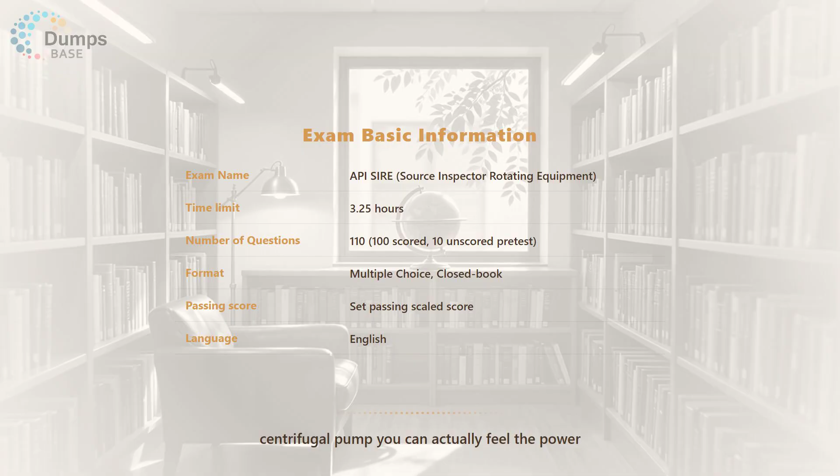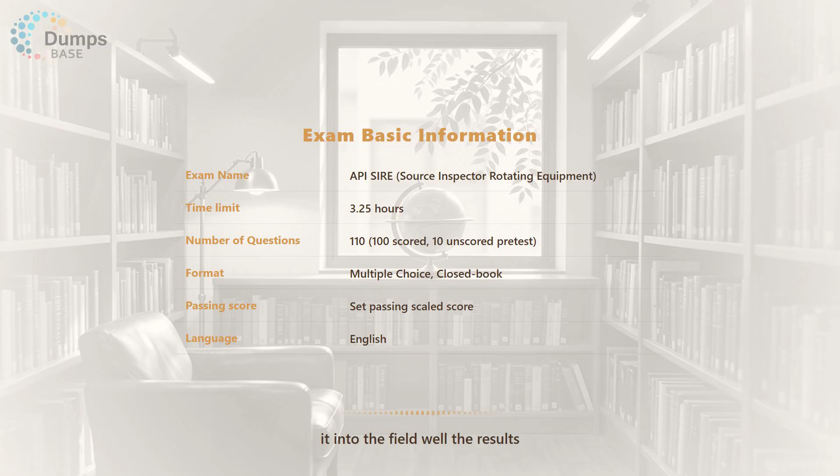Standing next to a massive industrial centrifugal pump, you can actually feel the power vibrating right in your chest. Absolutely, it is thousands of pounds of metal spinning at mind-bending speeds. And if one microscopic flaw makes it into the field, the results aren't just expensive, they are explosive. Which is exactly why the inspectors guarding the gates at the factory have to be absolutely uncompromising.

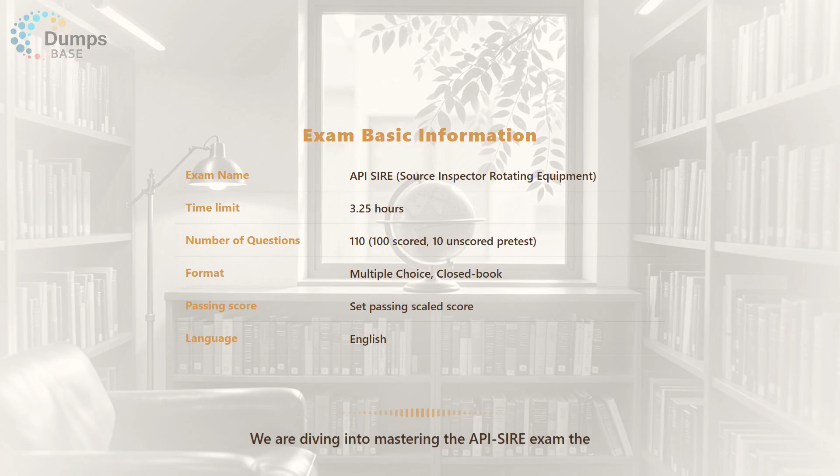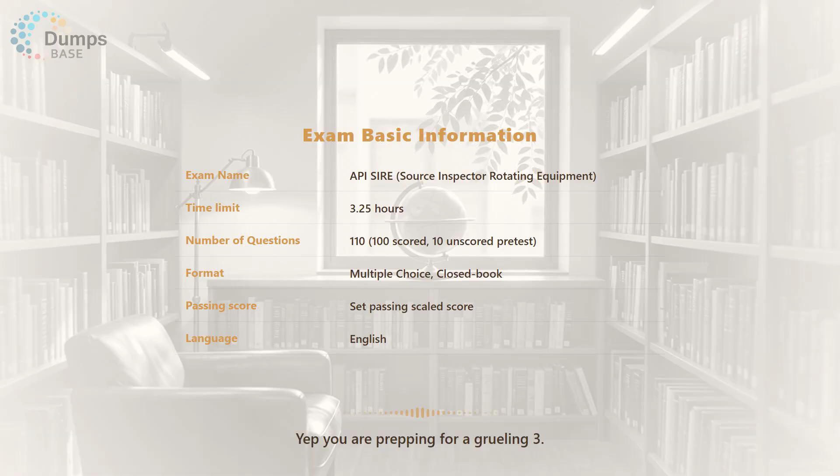And for you listening, joining those ranks is today's mission. We are diving into mastering the API SIRE exam, the source inspector rotating equipment certification. You are prepping for a grueling 3.25-hour closed-book marathon, 110 multiple choice questions in English with 100 scored.

Okay, let's unpack this. We are going to read five full practice questions aloud, but we aren't just giving you answers. We are tag teaming every single option, A through F, so you understand the exact underlying logic the exam demands. All right, let's hit the factory floor with our first scenario.

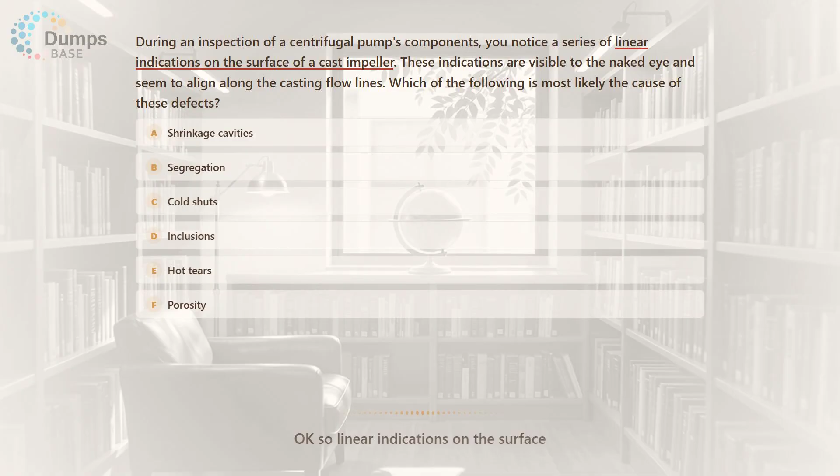The question goes: during an inspection of a centrifugal pump's components, you notice a series of linear indications on the surface of a cast impeller. So linear indications on the surface. Right, and they are visible to the naked eye and seem to align along the casting flow lines. Which of the following is most likely the cause of these defects?

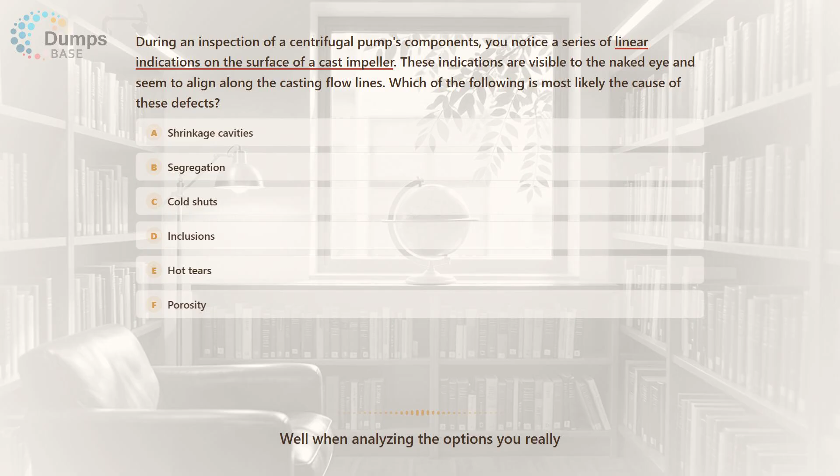Well, when analyzing the options, you really have to visualize the physics of molten metal. Could it be A, shrinkage cavities, B, segregation, or C, cold shuts? Or what about D, inclusions, E, hot tears, or F, porosity? Is this like baking a cake that cracks when it cools down too fast?

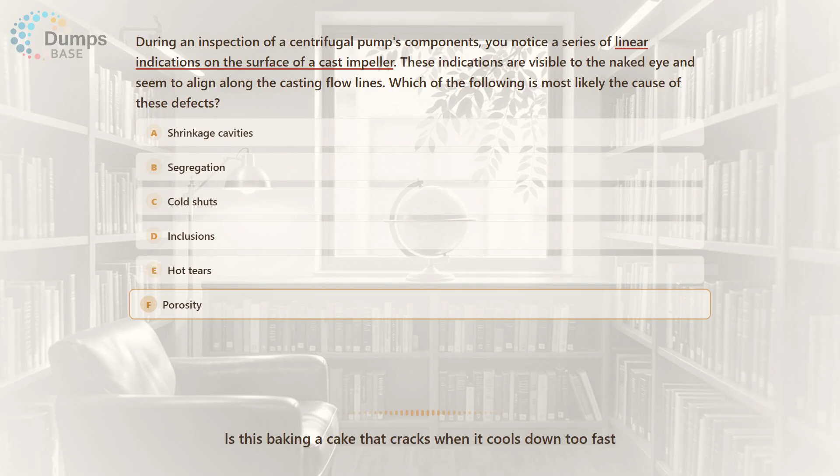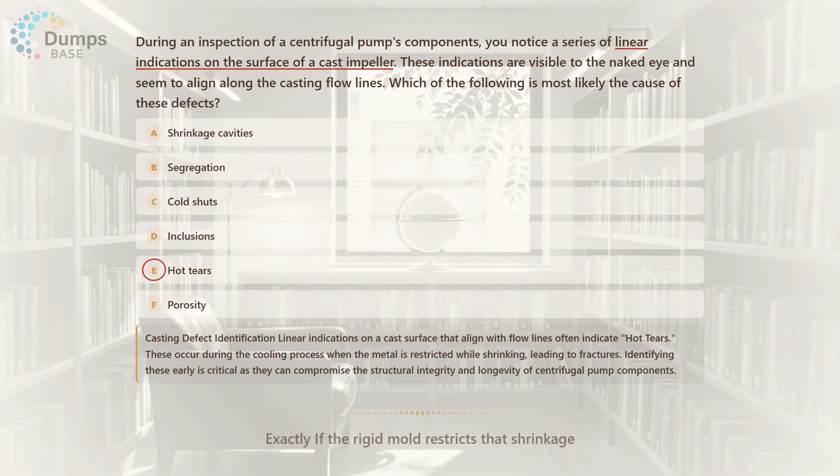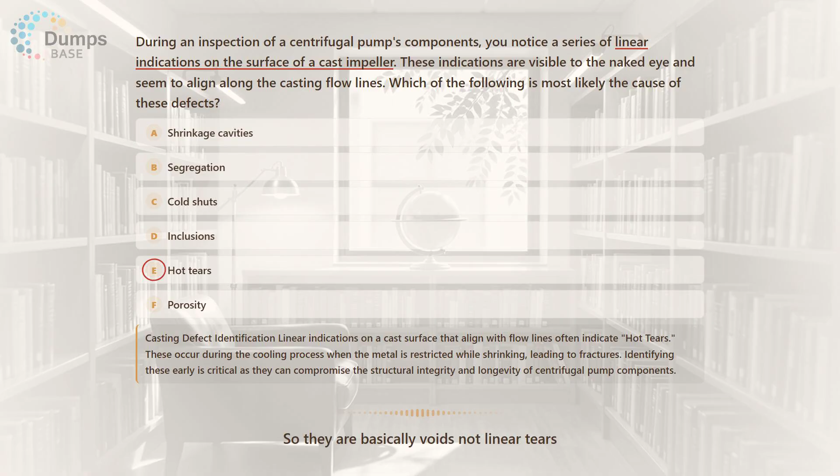Yeah, actually, the physics are remarkably similar to that. That tension points us directly to option E, hot tears. When molten metal cools, it inherently shrinks. So it just pulls itself apart. Exactly. If the rigid mold restricts that shrinkage, the stress physically rips the hot metal apart right along the flow lines. The other choices, like shrinkage cavities or porosity, are usually trapped gas bubbles. So they're basically voids, not linear tears. Right, and segregation, cold shuts, or inclusions, those are completely different material mixing issues entirely.

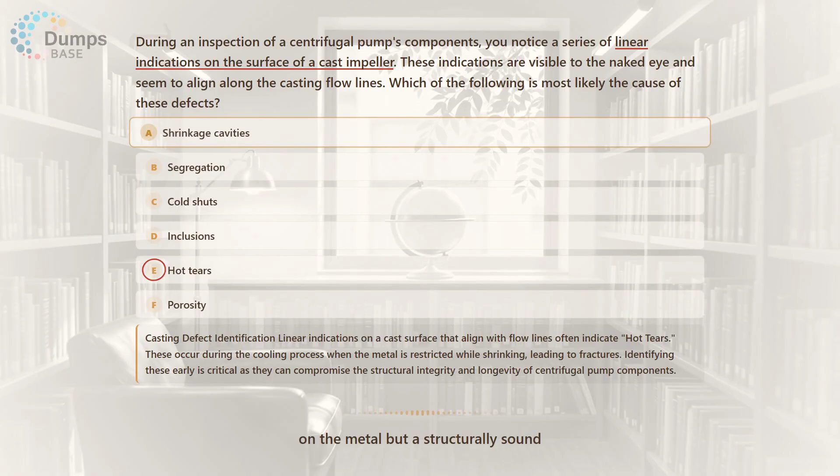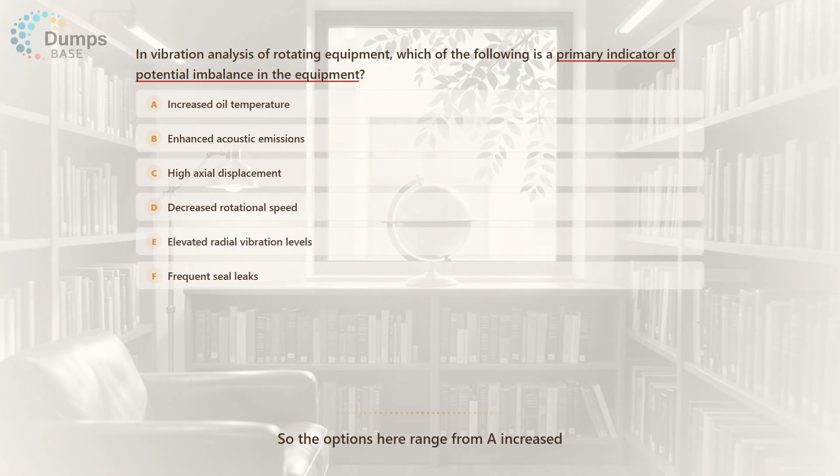Let's hear it. In vibration analysis of rotating equipment, which of the following is a primary indicator of potential imbalance in the equipment? So the options here range from A, increased oil temperature, and B, enhanced acoustic emissions, to C, high axial displacement, and D, decreased rotational speed. And then there's E, elevated radial vibration levels, and F, frequent seal leaks.

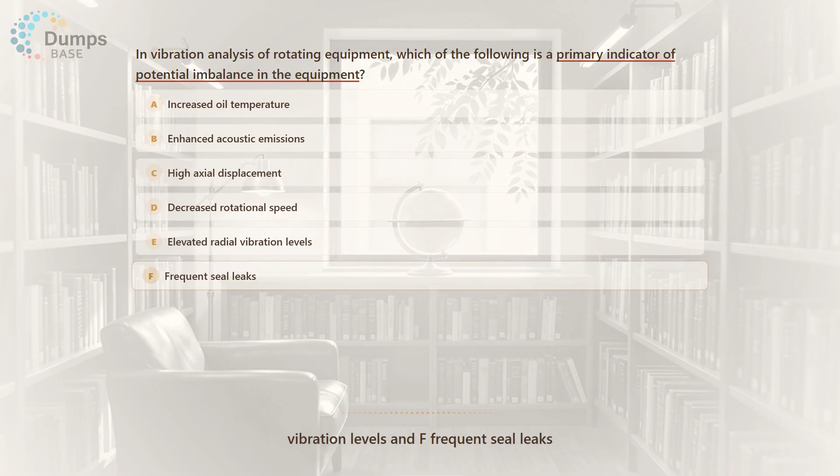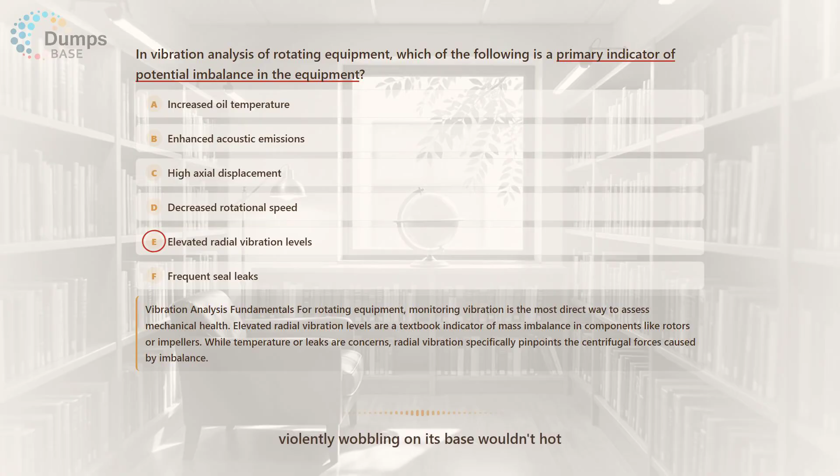Right, and what's fascinating here is how the exam tests your ability to distinguish a root cause from a delayed effect. The answer is E, elevated radial vibration. Wait, really? But if a massive industrial pump is violently wobbling on its base, wouldn't hot oil or frequent seal leaks be just as obvious? Oh, they definitely would be, but those are secondary symptoms. They happen eventually because the machine is literally tearing itself apart.

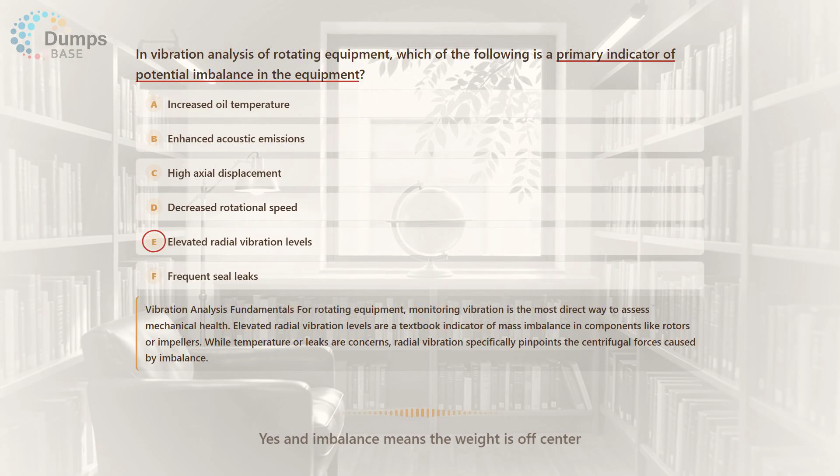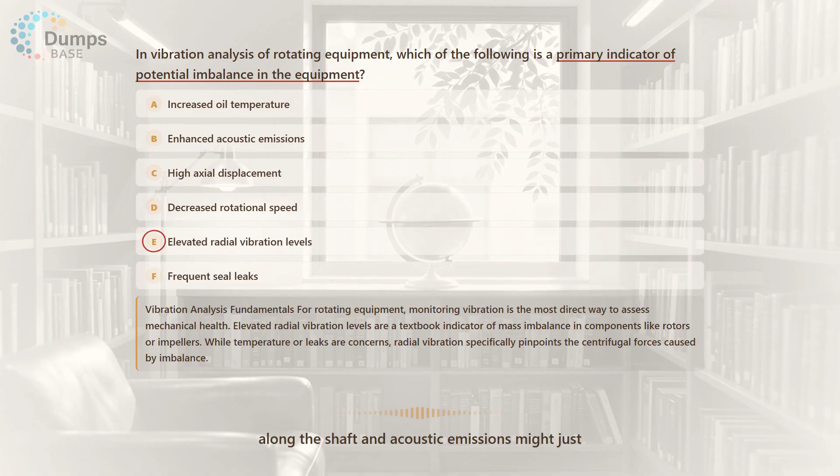The exam wants the primary, direct indicator. So the immediate physical reaction. Yes, an imbalance means the weight is off-center. As it spins, centrifugal force yanks the shaft outward, perpendicular to the axis. Okay, I see, and that specific outward shaking is radial vibration. High axial displacement is shaking lengthwise along the shaft, and acoustic emissions might just be one noisy bearing. And decreased speed is probably just an electrical motor fault, right? Exactly. Radial vibration specifically screams mass imbalance.

Okay, we've covered identifying the physical flaws, but this deep dive also needs to cover the corporate safety nets.

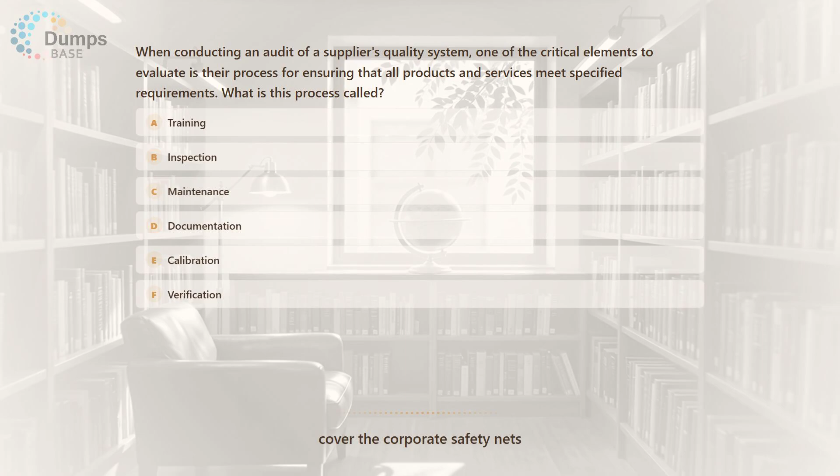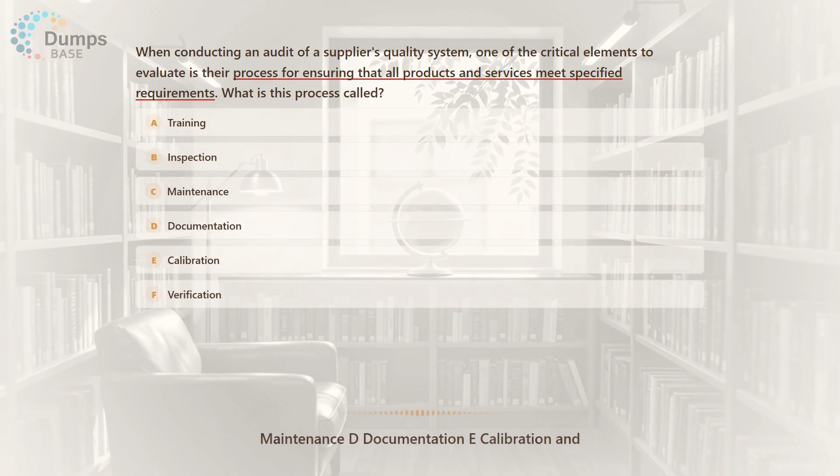The API SIRE exam heavily tests those systems. Let's look at a quality systems question. The text says when conducting an audit of a supplier's quality system, one critical element to evaluate is their process for ensuring that all products and services meet specified requirements. What is this process called? Options include A, training; B, inspection; C, maintenance; D, documentation; E, calibration; and F, verification.

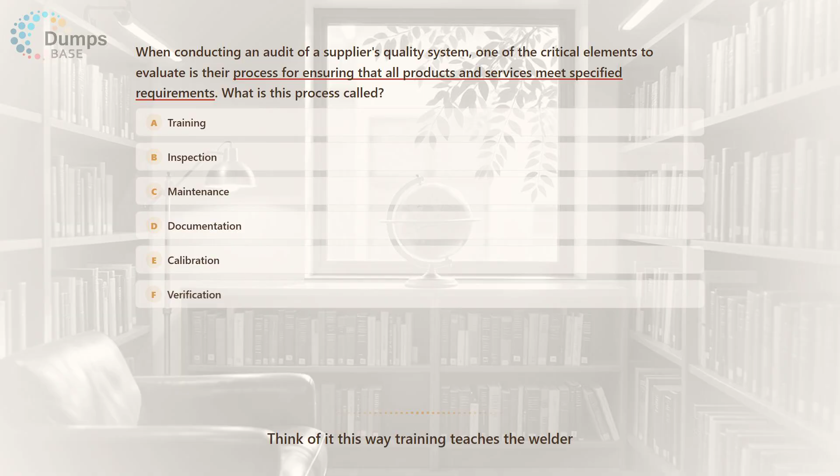I mean, those all just sound like mandatory quality control buzzwords. Well, they are, but verification is the formal umbrella. Think of it this way: training teaches the welder, calibration ensures the micrometer is accurate, and inspection gathers the physical data.

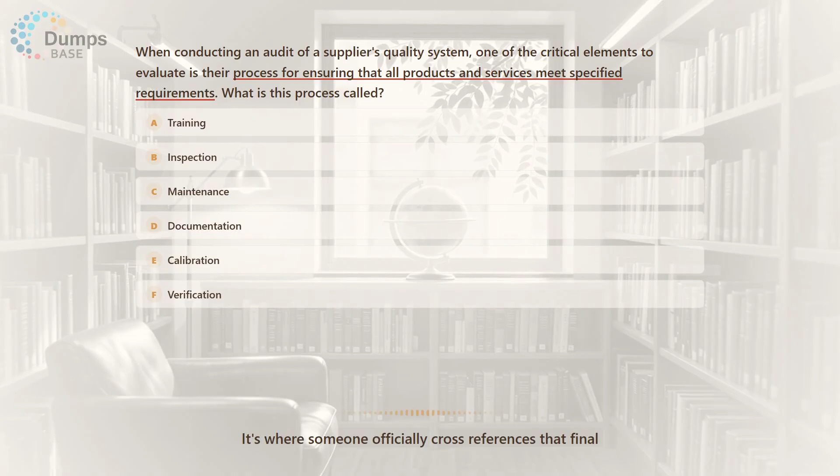But verification is the overarching protocol. It's where someone officially cross-references the final inspection data against the original engineering blueprint, and legally signs off that they match. It's the ultimate prove-it step, which makes F the correct answer. Which leads right into setting the boundaries for that proof.

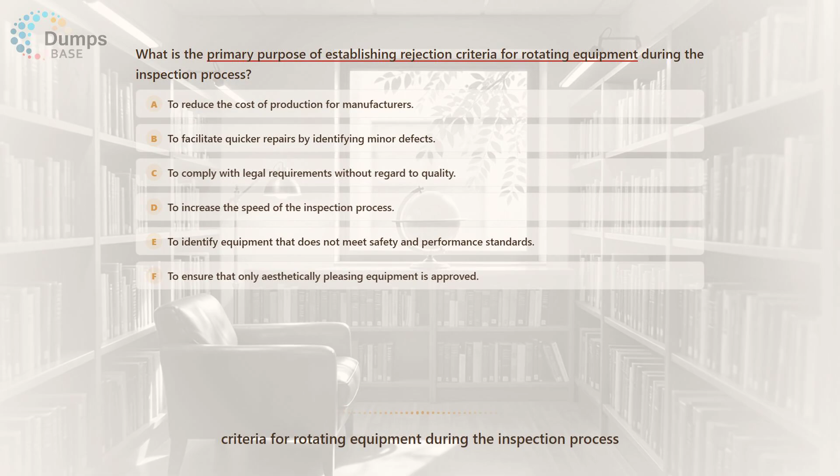What is the primary purpose of establishing rejection criteria for rotating equipment during the inspection process? Here's where it gets really interesting. The options suggest it's A, to reduce production costs; B, facilitate quicker repairs; C, comply with legal requirements blindly; D, increase inspection speed; E, identify equipment failing safety standards; or F, ensure aesthetically pleasing equipment.

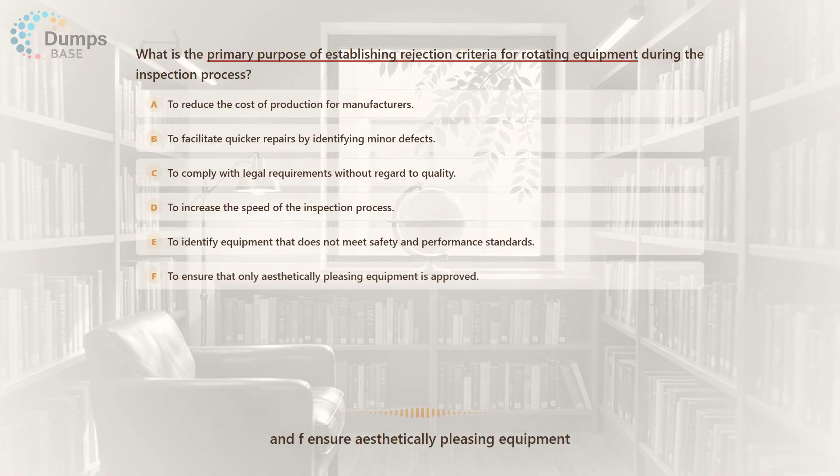Yeah, I am honestly holding out for an aesthetically pleasing pump. Well, a fresh coat of paint doesn't stop a rotor from exploding. The purpose is strictly option E, to identify equipment failing safety standards.

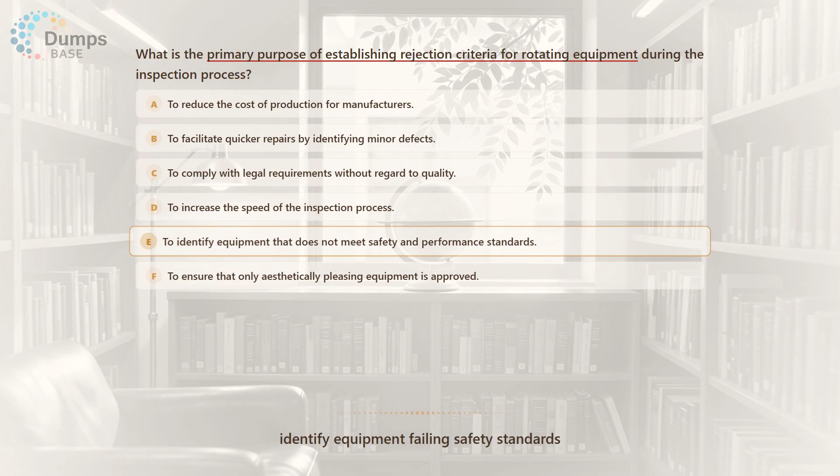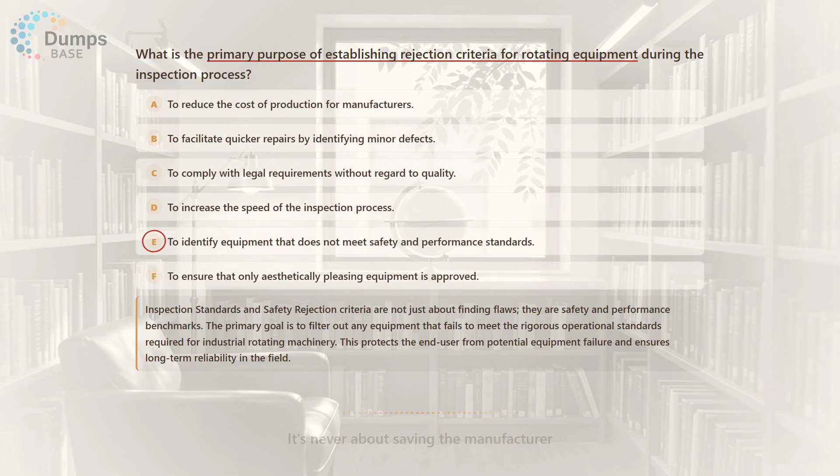So it is all about protecting the end user. 100%. The exam wants you to understand that rejection criteria exist entirely to prevent catastrophic failures. It's never about saving the manufacturer money or rushing the inspection speed, or just checking a legal compliance box. Exactly. Safety benchmarks require flawless tracking.

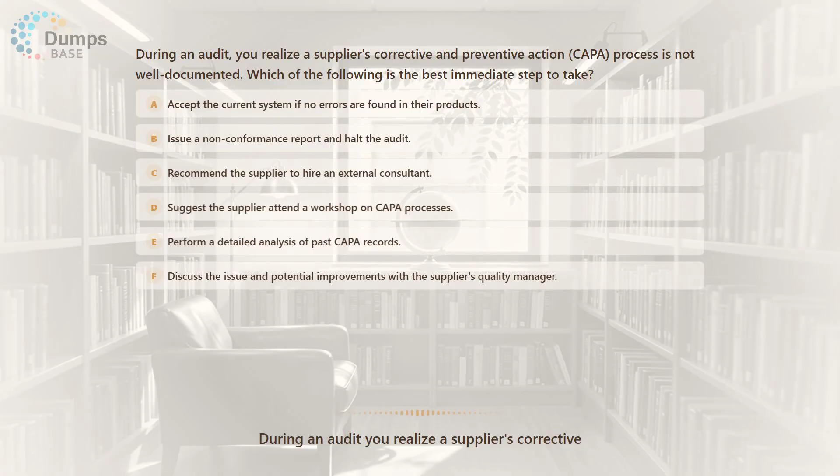Let's look at our final scenario then. During an audit, you realize a supplier's corrective and preventive action, or CAPA, process is not well documented. Which of the following is the best immediate step to take? A quick note here: CAPA is the system a company uses to investigate why a defect happened and how they'll prevent it next time.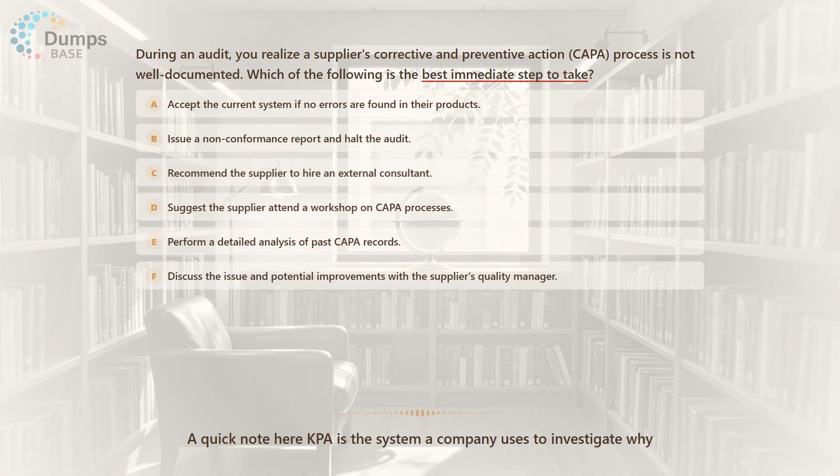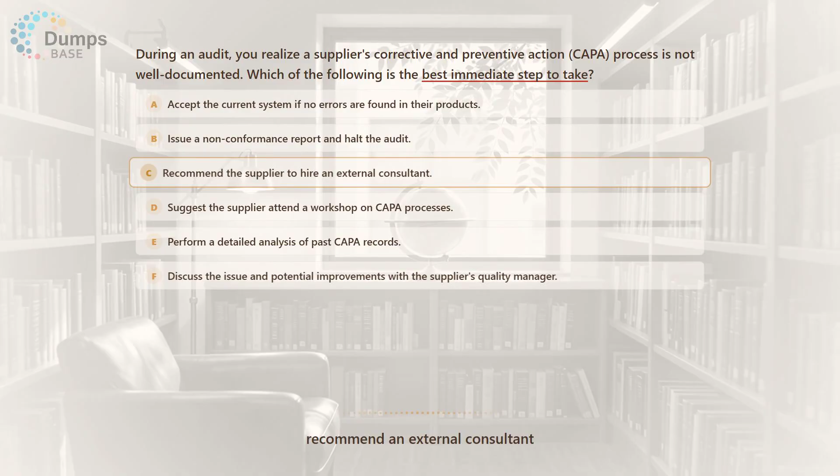So when an auditor finds a broken CAPA system, the options are A, accept the system if products look fine; B, halt the audit entirely; or C, recommend an external consultant. Along with D, suggest a workshop; E, analyze past records; or F, discuss the issue with the quality manager.

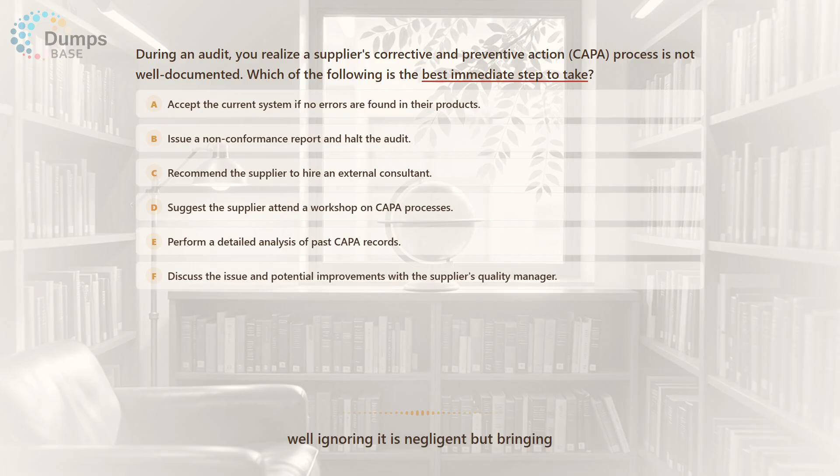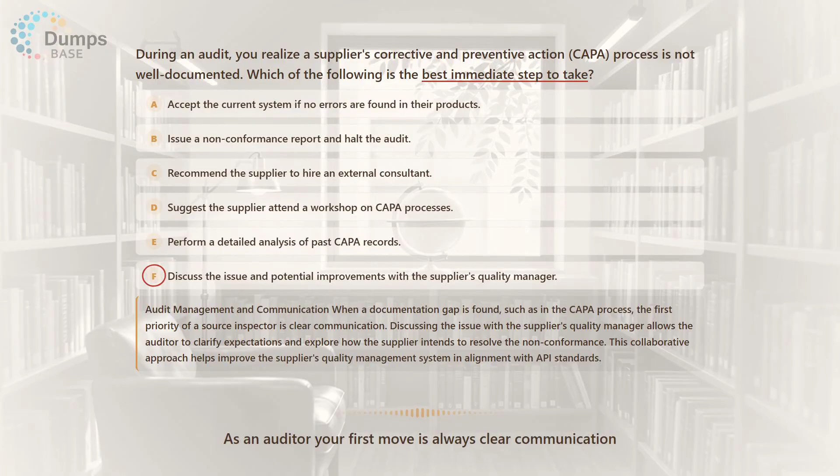Well, ignoring it is negligent, but bringing the entire factory audit to a screeching halt just feels like a massive overreaction. Precisely. That's why the immediate step is F, discussing it with the quality manager. As an auditor, your first move is always clear communication. So suggesting consultants or digging through archives just bypasses that crucial first step.

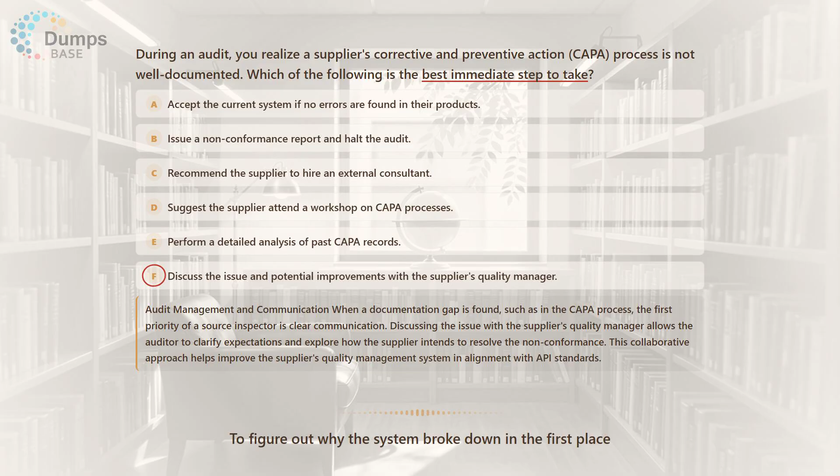Yes, you have to directly collaborate with the team on the ground to figure out why the system broke down in the first place. Okay, so conquering this exam really means understanding the why: the physical tension causing hot tears and the outward centrifugal forces driving radial vibration, along with the blueprint-matching proof of verification and understanding rejection criteria as life-saving benchmarks.

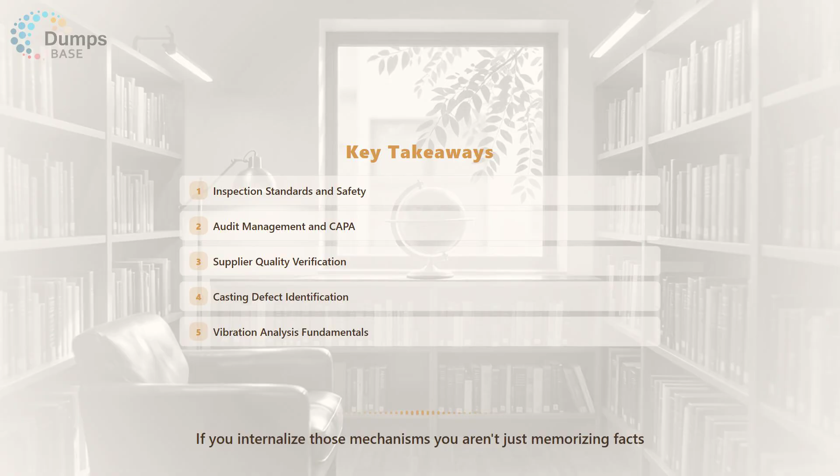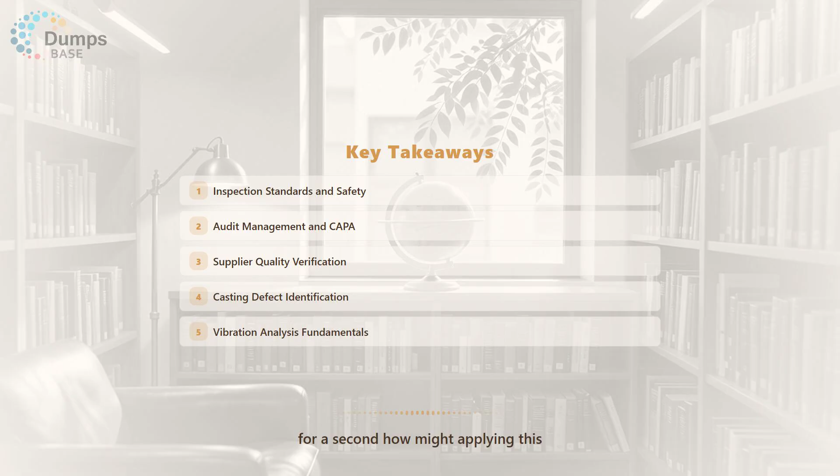Right, and prioritizing communication when a safety process fails. If you internalize those mechanisms, you aren't just memorizing facts. No, you're actually ready to protect the field. Which leaves us with a thought to mull over: if we step away from centrifugal pumps for a second, how might applying this rigorous formal verification mindset expose hidden vulnerabilities in the daily systems you rely on in your own career? Especially when you prioritize direct communication when a process fails. Definitely something to think about next time you blindly trust a process.